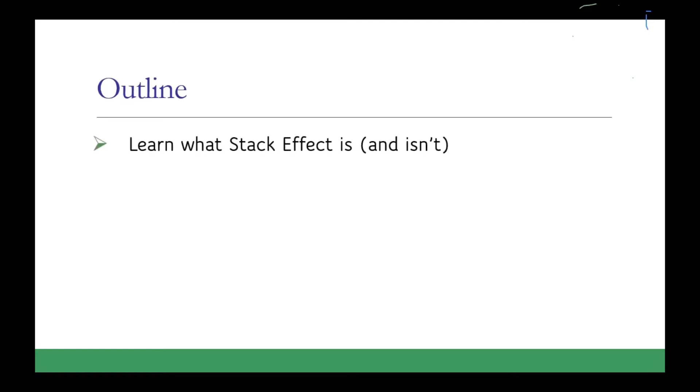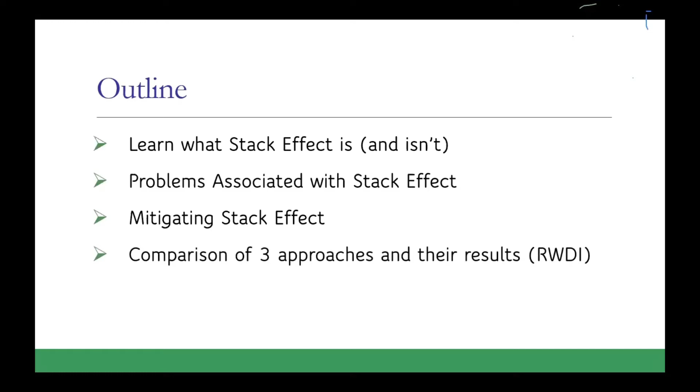So this is what we're going to learn: what is stack effect, maybe what stack effect is not, some of the problems we see with stack effect, how maybe we can mitigate those things, and also compare 3 examples that were also provided by RWDI, which looks at 3 different ways they could combat it and how it worked out for them.

So what is stack effect? Does anybody mind if I take this jacket off? Ken said I had to wear a suit, and you're in a lot of trouble now, Ken. I appreciate that. But he did not say that. I'm going to walk around a little bit if that works for everybody. I got this fancy microphone, I can seem to be able to do that. This seems to be a little bit easier. And also I can cheat and read some of the slides.

A lot of people think, well, stack effect, that's just where hot air is rising up in a building, and it's a giant stack of hot air column coming out at the top of the building. That's what stack effect is.

And while that's not completely wrong, it's mostly wrong. It's not hot air rising in a building.

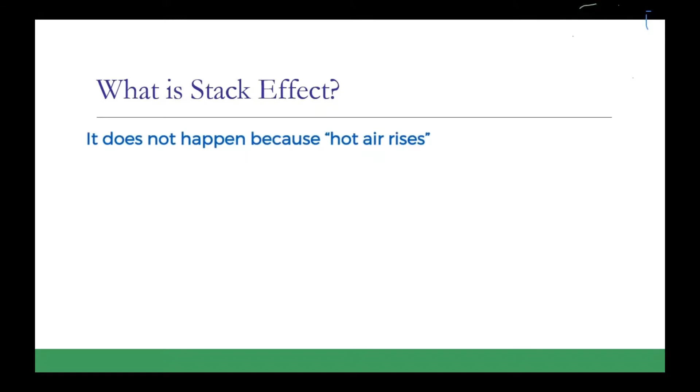Stack effect, by definition or by understood community definition, is a phenomenon that can happen in any building, not just tall buildings. It's associated with the differential pressure coming from indoor and outdoor based on temperature differences. So it's temperature and building height. That's what it is.

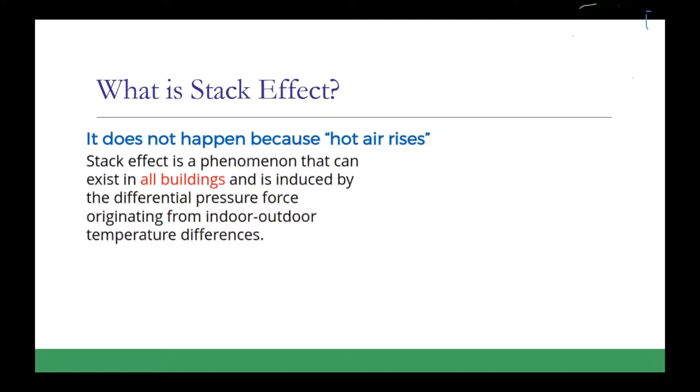In this example, you have hot air going up, say, an elevator shaft. You have cold air coming in at the bottom, and hot air going out at the top. The lower you are at the bottom, the more air is coming in. The higher you are at the top, the more hot air you have coming out the top.

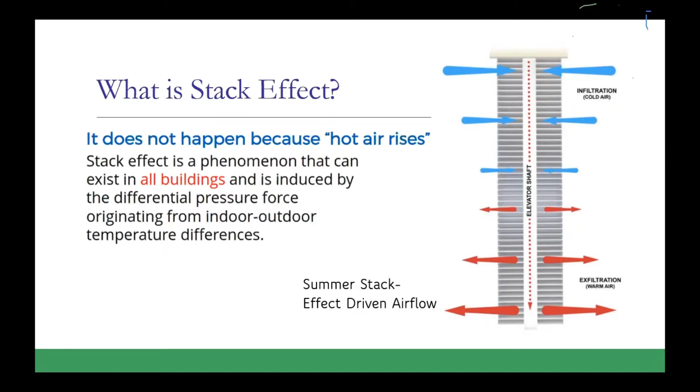Then you have summer-driven or stack effect, where cold air is coming in at the top, and hot air is going out at the bottom. This is also called reverse stack effect, okay?

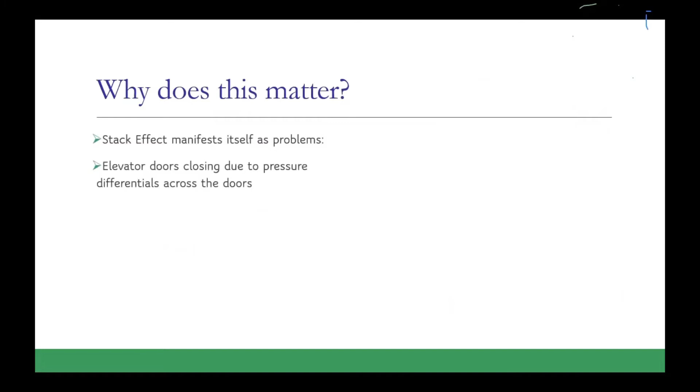Why does it matter? Well, it's a problem. Elevator doors can't close because there's so much pressure differential across that elevator door. Serious problem. You can't control the temperature in the downstairs lobby or upstairs penthouses or somewhere along the way. It just cannot flat be controlled whatsoever.

You have infiltration or exfiltration going through walls that were not supposed to have air going through them. And that's also exacerbated by the fact that the pressure differential is so high that that medium was not expected to have to deal with that.

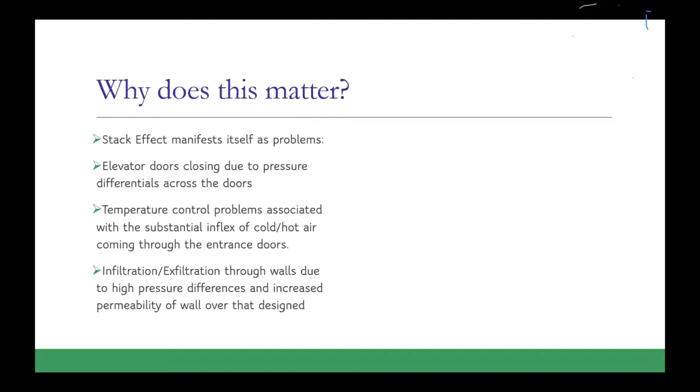And then any little imperfection along the way just gets blown out of proportion. So you'll have a wall that should be able to handle, say, a quarter inch or one inch, whatever. Well, it's seeing 1.5 inches. And once it sees 1.5 inches, it couldn't see a quarter inch anymore either, because it got damaged, so to speak.

So we've also seen a lot of different engineers try to handle this in different ways. You see a lot of different things in the industry. That's why we need to talk about what works, what doesn't work, and what's a really bad idea.

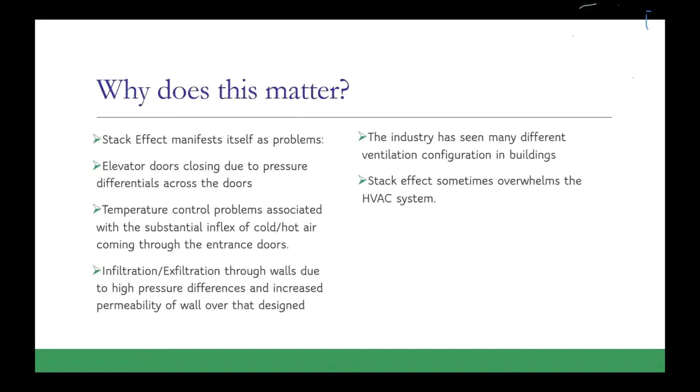Sometimes the stack effect can overwhelm the HVAC system. The HVAC system can't keep up with it, can't handle it. In fact, let's change that to often overwhelms the HVAC system. In some cases, it's the HVAC system that's making the problem worse.

Once you understand exactly why it happens and where it's coming from — because it's really fairly simple, honestly — once you understand that, then you can say, you know, this design could lead itself to stack effect. I'm never going to be able to balance this building. I'm always going to have problems with this lobby. This is always going to be a problem for these corridors.

Also, another thing is you may have a designer that wants to do it right, but because you have a design being influenced by local AHJs, local design practices, and local codes, they actually have to do something they don't want to do. They're not allowed to do what they want to do. So you'll see that influence as well. That's why it's a problem.

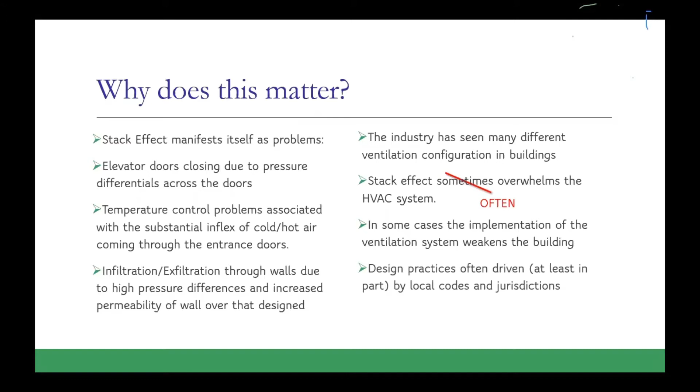So just looking at stack effect in a cold climate: similar to before, the temperature outside is much less than inside. Buildings act like a chimney, and you're going to have air entering at lower floors, exiting at upper floors, and your NPL — that's your neutral pressure level — is the point at which the pressure is neutral in the building.

In this example, what you see right here is the inside is completely open. You have very consistent penetration all the way down the side of the building. Nothing greater at the bottom floor, say like lobby doors, nothing greater at the top, say like a louver at the top of the elevator shaft. It's just a perfect, clean example with everything assumed perfectly and no wind affecting it whatsoever.

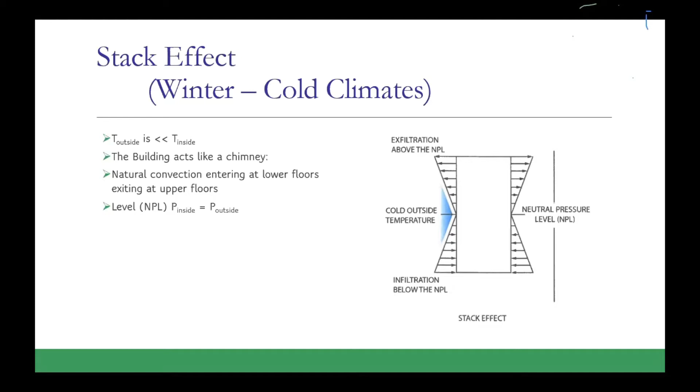This is a cold climate condition. So if you have a summer climate condition, temperature outside is much greater than inside, natural convection entering floors upper, lower, you still have an NPL. You're always going to have an NPL of a building. But it's in the middle because of this perfect world example.

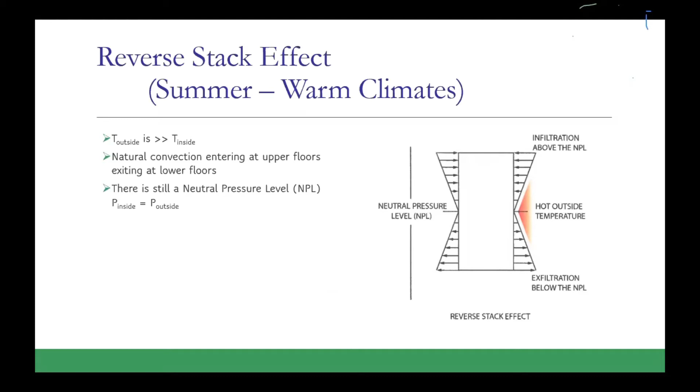It moves around in real world examples — it moves around because a door got open, it moves around because somebody built something that wasn't there before in the middle of the stairwell. It can happen for all the NPL, but there is a point in every building where the pressure is neutral, and that's the NPL. So this is a warm climate condition.

So is it pretty even? Warm climates, cold climates — does anybody know the answer to that?

It's written up there, but does anybody know the answer to that? You just nod your head if you know the answer.

You don't really have as much of a stack effect issue in warmer climates. I'm not saying it doesn't happen - that absolutely happens - but it's not the terrible problem it is in colder climates. That's because it's driven by temperature difference: the bigger the temperature difference, the bigger the stack effect, and also the taller the building. So if you have a very tall building in both a northern and a southern climate, the northern climate has a massive temperature differential in winter, whereas the summer building doesn't have a massive temperature difference - it has one, but it's not giant. And that temperature difference is a large driver of stack effect.

So most of the conversation you see about stack effect - what its problems are, solving it - most of this presentation is really looking at it from a winter perspective. But it can exist in both. You do have reverse stack effect, and it's generally the same cause, just a flip of the situation, cold versus warm. You can have buildings that have stack effect in the wintertime and then reverse stack effect in the summertime, because the same problems that cause wintertime stack effect also cause reverse stack effect in summer. It just flips.

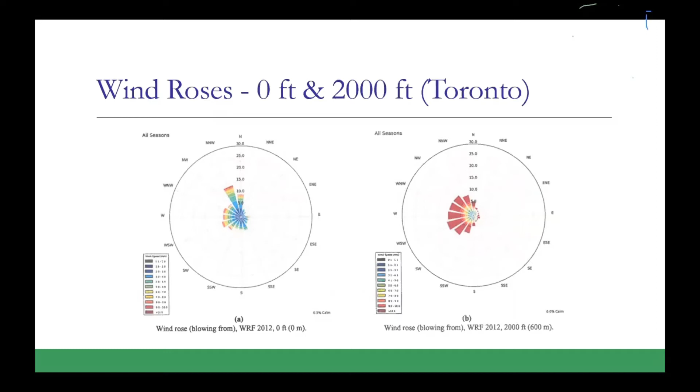This is interesting - this is in Toronto, and you can see this is called a windrose, just showing air leaving the building. You can see a fair amount of air leaving the building on the northwest side down at 0 feet, but then look up at 2,000 feet and you've got a ton of air leaving the building. So that's a lot of exfiltration at the roof. That's Toronto. Go to Dubai, it's basically the same thing - so even in warm climates, you still have stack effect.

So what is it? I need to understand this - explain it so that my 10-year-old can understand stack effect, really.

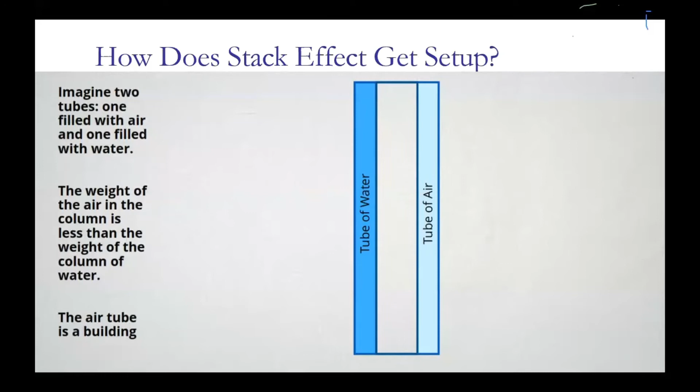Okay, imagine you have a giant tube of water and a giant tube of air. The tube of water weighs a lot more than the tube of air - a lot more pressure at the bottom. We're going to consider the building the tube of air, and the outside the tube of water. Now we open it at the top and the bottom, so you have a lot of water gushing into the tube of air at the bottom, and air going into the top of the tube of water. Except due to the magic of science - since this is just make-believe - they turn into water at the top and turn into air at the bottom. And that's stack effect. It's the pressure, now temperature driven, but that's what's going on - it's driving it in at the bottom and sucking it out at the top.

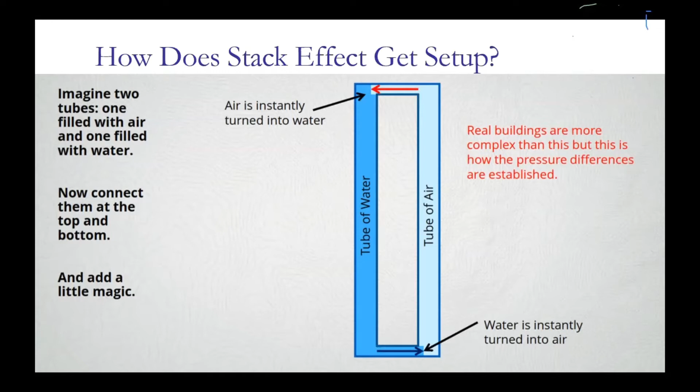These slides in particular were actually provided by Duncan Phillips.

Now that doesn't count wind, and it doesn't count mechanical systems - that's just natural stack effect, if you had the whole building open, the pressure differences you'd be facing. So the only thing to mitigate that is the things you can do to stop stack effect - the obvious things, like the revolving door you see at the bottom of every hotel, and maybe not having the top of the elevator shaft open. I know they're worried about piston effect and other things, and you've got smoke control, but there are other ways to handle it than just opening it to the outside.

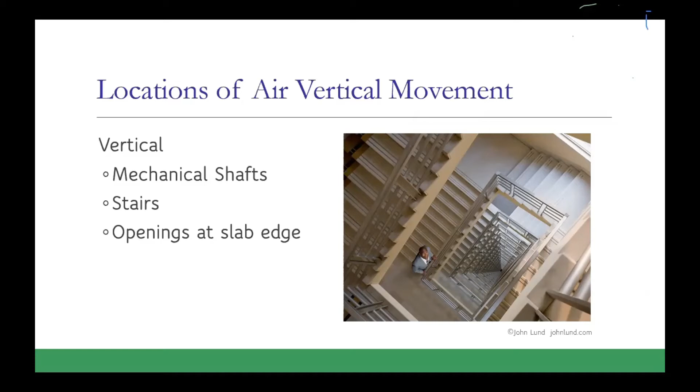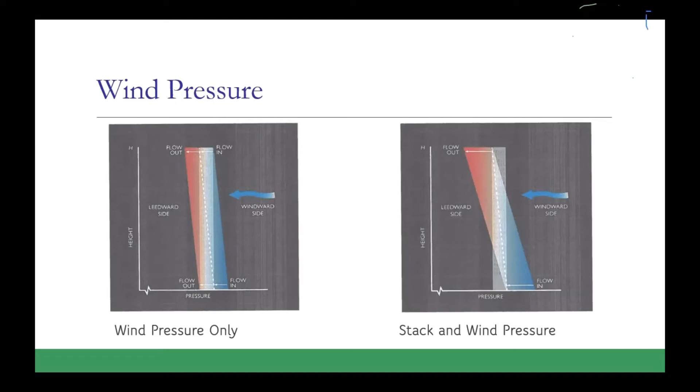So what can you do to mitigate your stack effect? What can we do to stop this? Well, you want to look at things that tend to be open for extended periods of time, that are drawn closed in the plan and are closed when you test and balance the building, but are open a lot when they're operating a building.

Truck door bays are killers. They defeat the auto opening and auto closing so that it's not a nuisance, and it's just drawing in tons of air or exhausting tons of air.

Exterior lights and soffits outside are another major problem we see. The soffit comes out overhead, open to the inside above the ceiling, and they've got a little fixture with nice tiling or whatever on the side. It's impermeable, but then they just cut a big hole that's extra half-inch bigger than it needs to be, and put a little light fixture in it, with openings all around it. It's not really well sealed.

There's tons of those lights. You look in the ceiling, you see every single one of them - not any tighter than that, and I could see right through it. They all look like that. They don't get water in them because they're on the underside of a roof, but man, they're letting in lots of air. The stack effect's just sucking on it. Remember that column of air? It's pulling hard.

Vestibules and airlocks, we see that a lot. That's the standard for sure. But there's a reason why they're there.

Revolving doors, same thing. We'll get into this in a minute, but individual systems - if you have a common system serving many, many floors, it in itself is a conduit of air. So your lobby system for sure should be on its own HVAC system. It shouldn't be connected to everything else. But also you want individual control on your exhaust, individual control on your outside air. I'm not saying you have one makeup air unit, I'm just saying you have individual control at each system.

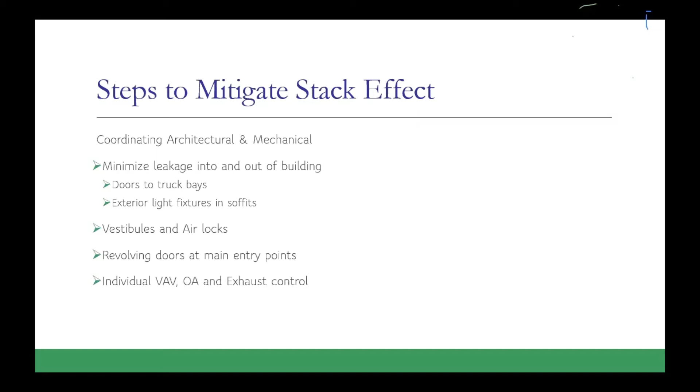So let's stop for a second and think about that. Let's say I had a giant makeup air unit and I had openings at every floor, but nothing actively controlling the amount of makeup air to individual floors. You can identify and say, well, I'm going to have trouble - that's inviting stack effect. The architect worked really hard on their fenestration, facades, lights, revolving doors and all this stuff, and then the mechanical guy just comes in and puts a big opening all the way up the building with this makeup air unit.

Tight exterior wall, it's not just in specification. One of the problems I talked to Dr. Simmons about is they basically test for infiltration on most facades, but they don't test for exfiltration. They always just assume it's the same. But a lot of those things work like check valves - they can hold it out, but they can't hold it in.

And again, it flips every summer. Whatever it is in the wintertime, it's going to be the opposite in the summer. Maybe not as bad, but it's going to be the opposite. So once it gets damaged as a material, it's now letting air in and out.

And then also installing - got to make sure the people are there. So you, as a test and balance guy, see somebody doing a terrible job installing, especially on a tall building, you say, this is going to kill my test and balance. I'm going to have trouble doing my job because he's not doing his job right.

By design, you should have 5% more outside air than all the exhaust on a tall building. That's just a good rule of thumb - minimum, could be more, but a minimum.

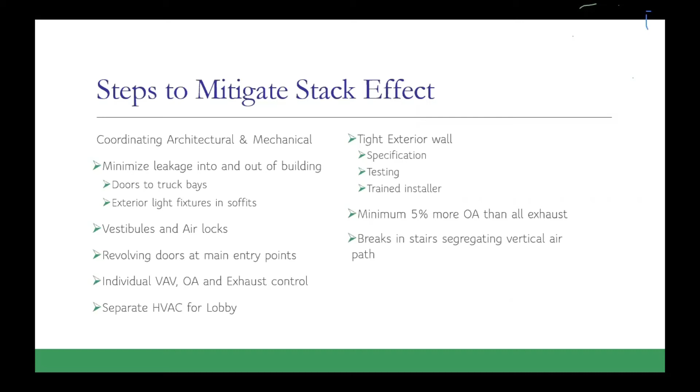Breaks in stairs - I don't see this a lot, but this is what they're recommending. You don't see it a lot, but it's an obvious good idea. Why wouldn't you want to have a break in it, a difference in the air? I go into places all the time now and see the elevators broken up into 3 different levels - great idea. Why are they still doing the stairs as one giant column of air? I know the doors are closed a lot of times, but not always, and it creates problems. And seal the top of the elevator shaft.

So if you're going to have air coming into a space and leaving a space, like exhaust and outside air, you want it to be on the same system, on the same level. You don't want to bring in air up high and exhaust it low, because you may have stack effect overdriving that, or you may be fighting a differential pressure your fan's not sized for. If it's on the same level - in a bit we'll see an NPL moving up and down a building based on open doors and whatnot - but if it's on the same level, it doesn't matter, it's always fighting the same. So everything entering and leaving on a system should be on the same level.

You want to pressurize key areas. I think I'm preaching to the choir on that one, right? But pressurize your lobby, pressurizing the top of the elevator shaft is a really good idea, and pressurize all the corridors.

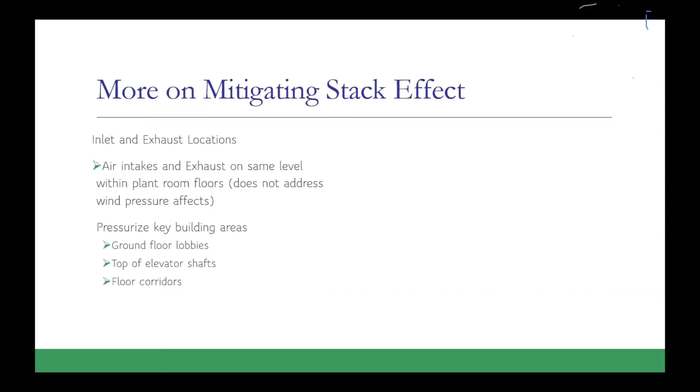Control systems - I know this was titled control systems. I feel like I hopefully haven't misled anybody into thinking you're going to get a 1 hour long presentation on controlling outside air systems, but basically you want to have systems that can allow you to control the amount of outside air you're giving to any given level. They have sensors at each level that tell you whether or not the pressure on that level is a problem, due to whatever, and we'll see in a minute where that could pop open. It doesn't have to be complicated in explaining - of course doing it is more complicated, but the idea isn't. Put in a control system that allows you to control the amount of outside air you're giving to any given floor or location based on how much air it really needs. That's a great way to mitigate it.

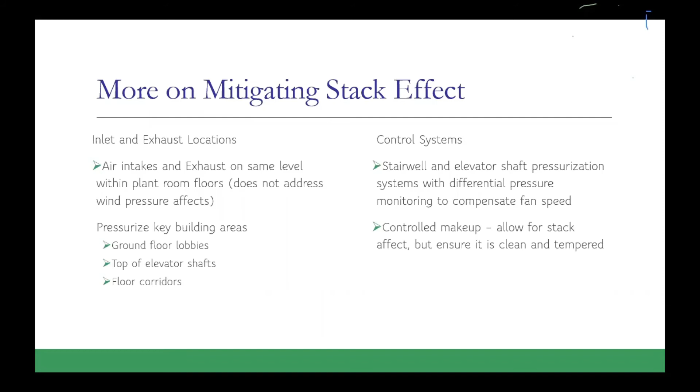Controlled makeup - I'm not a big fan of this one, but some areas are saying, hey, we can't stop stack effect, but let's just make sure it's controlled when it comes in. It's the right temperature, and it's clean.

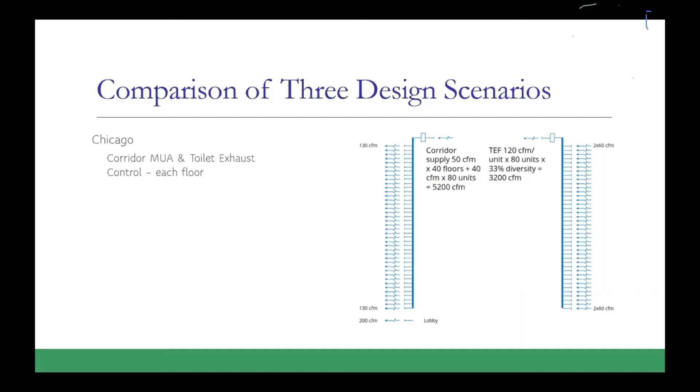All right, so here's 3 different design scenarios - by the way, we're actually almost done. Chicago: what we did there is we have supply CFM to corridors, each individual corridor having a controlled amount of 50 CFM, and each unit on that floor has an exhaust. Assuming the toilets are on and off and there's diversity, you have 3,200 CFM exhaust. So that's individual coming in and individual leaving - it's all coming at the top, but it's controlled delivery down the building. Everybody see that? We'll go back to it in a minute, just compare.

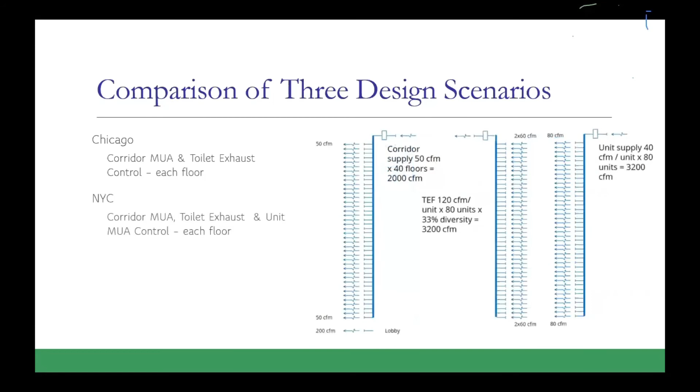Then you have New York City - I did the same with the corridor supply, but we did less to the corridor. We still have the exhaust the same way, but we're also individually supplying to each unit, so each individual unit gets a bit of air and is exhausting its toilet, and then you also have air going into the corridor. Last you have Toronto, where we just put air in the corridors, that's all I did. So Chicago, both; New York City, all 3; Toronto, just the last one.

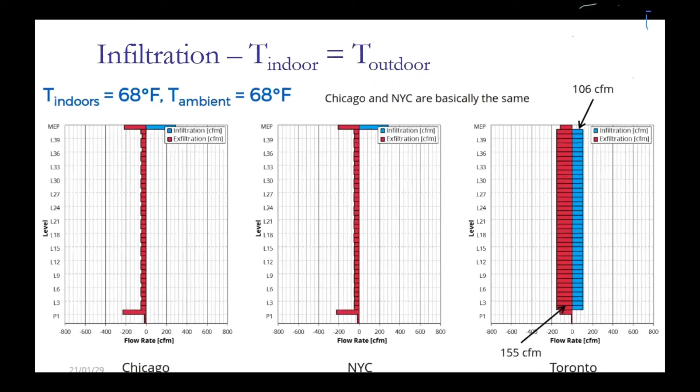This is what it looks like if there's no air and the temperature is the same - 68 degrees outside, 68 degrees inside, there's no air, everything's static. You have some high infiltration, exfiltration at the top, because that's where your fans are, but down the building it's relatively centered. So this is kind of your baseline, right?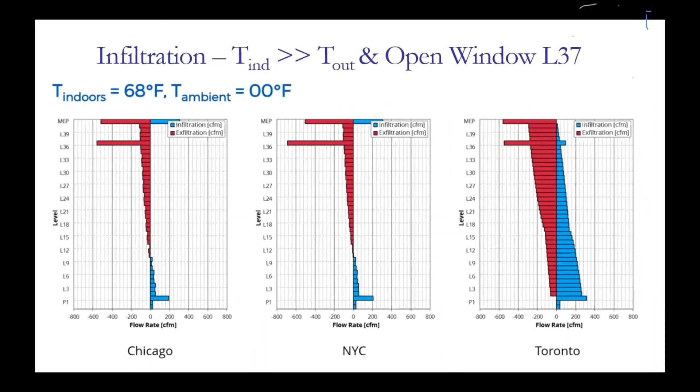Moving forward, open a window. See how much your exfiltration jumped? I'm sorry, infiltration jumped on Toronto. How much more air was coming in because you gave it another location at the top of the building for it to leave? Pretty significant.

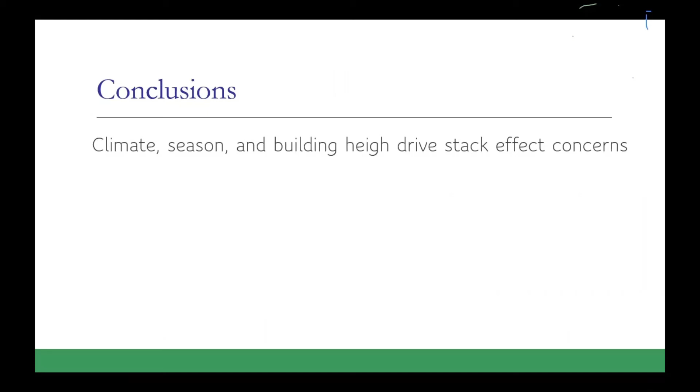So in conclusion, it's your climate, which season it is, and building height, because it's temperature and building height that drive it. So climate, season, and building height are going to drive your stack effect. It's not just any one individual, it's your architects and engineers, but it's also your installers. Any one of those three, and certainly all three, can create a problem built in. The building just as built has an inherent problem with stack effect. It absolutely can happen. There's nothing you as a testing and balancing guy can do to fix it.

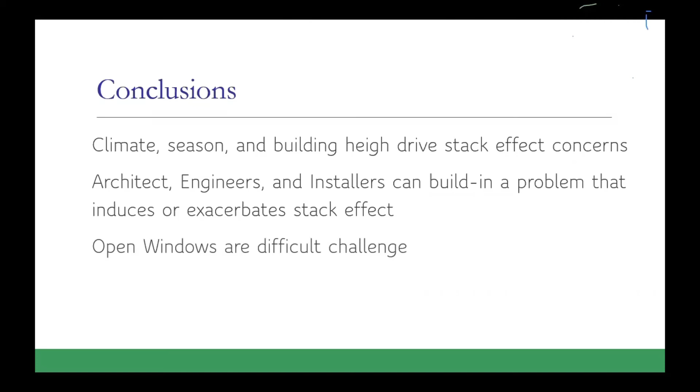Open windows suck, they're terrible, they truly cause problems. ERVs, which is kind of how we're doing the toilets and the intakes on those levels, they need to be on the same floor. The intake, the exhaust needs to be on the same floor. And we can't control occupant behavior. Just be aware.

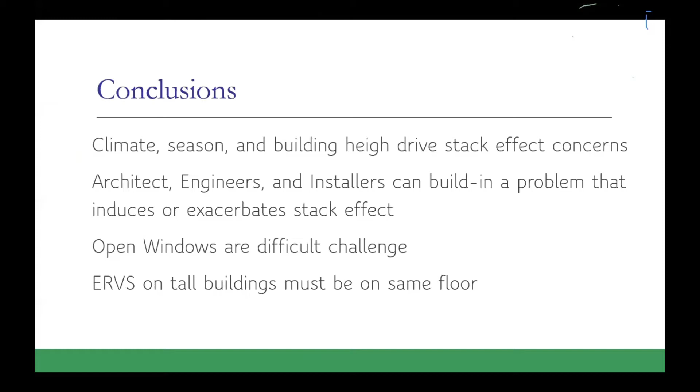I want to pause you there for a second for the people online here dealing with food processing area, no outside air in an open area. Keep on, good doors, good seals.

Had positive pressure to the outside of 0.01 inches. 0.01 inches is not a lot. On that chart, you could open up fundamentals and it gives you the equations of this chart, and you could plug in the numbers that you have, and you can know exactly what the natural stack effect would be, because it's height and temperature difference. So the colder it was inside, the warmer it was outside. If there was a significant difference, say they had it in the 60s, and outside it was in the high 80s, well, you've got a 25 degree temperature difference, 25 feet, throw those into the formula and you say, well, my natural stack effect pressure is going to be this. And 0.01 isn't very much. So it absolutely is possible.